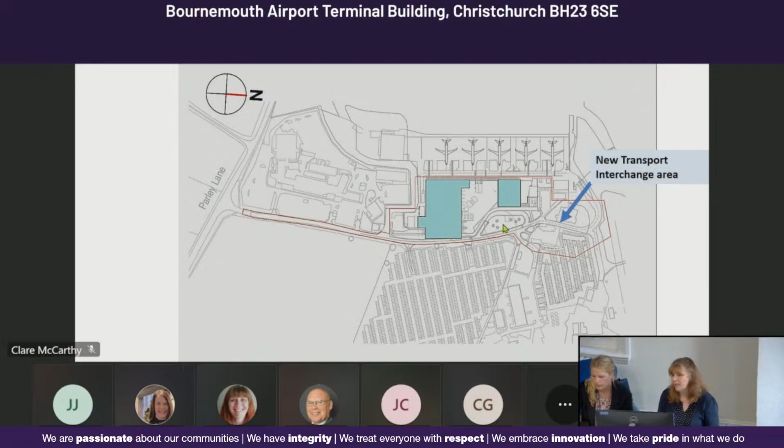So just to start with a bit of history, which is very important here for the terminal. In 2007, the terminal permission and legal agreement that went with it remains relevant for all matters to do with monitoring and controlling operations at the airport and passenger numbers. So this application is not going to take on that role of monitoring or controlling operations. That sticks with the original terminal application.

And with that, I want to read out all the matters that are listed on the screen, because it's really important, because we have received representations. There have been some late representations, 40 representations on the 25th of August, on Bank Holiday Monday, arrived from residents of Brockenhurst, really concerned about low-flying aircraft and aircraft noise.

And this is a matter which is controlled by the original Section 106 agreement, which has been varied in 2010 and 2015, and may be varied again in the future, but it all relates to that application. So what you're looking at, members, today is the physical extensions and the impact on traffic and the impact on environment from the extensions that are being undertaken and the transport interchange.

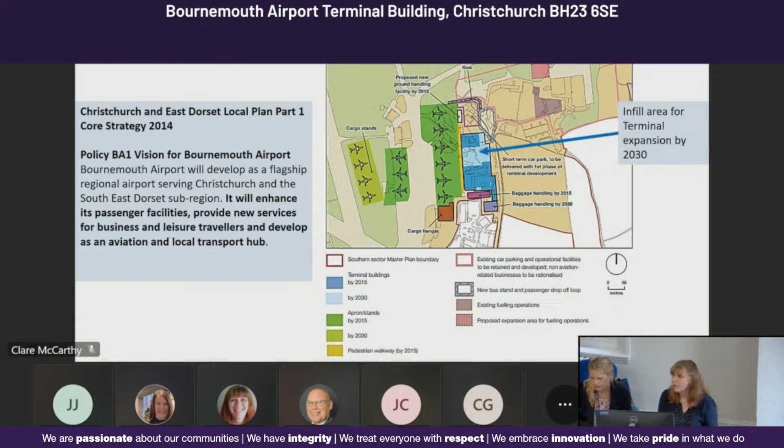This area down here, where it's going to be extended with a similar design, is also just hard standing and temporary buildings. Baggage will be shown later in this area, and that will cover the new extensions.

As I've mentioned before, this is the existing transport interchange, and it doesn't accommodate well enough facilities for buses, for taxi drop-offs, for cycles, and for access through. So the airport is investing in a completely new passenger interchange, and this area will become largely landscaped and hard surface for giving access to the new terminal buildings.

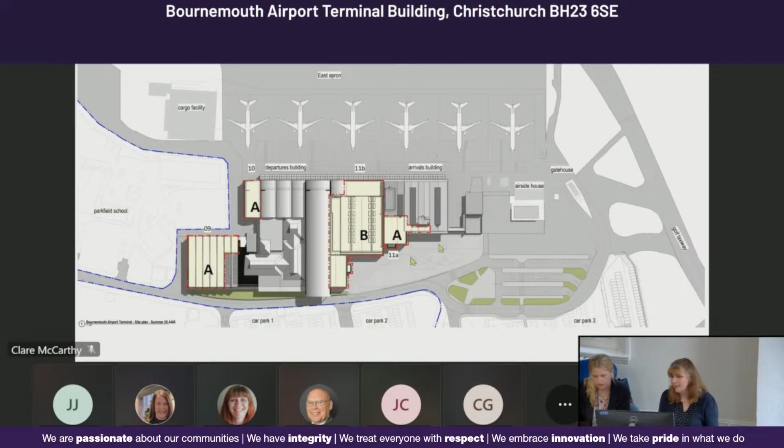As an engineer, the drawings are all engineering drawings, and the elevations are very small because we have 185 metres measured between the end of arrivals and the baggage area down here, so it's very hard to show in great detail.

So what I've done is zoom in on the arrivals part here. This is the view from the car parks at the airport. The east view is if you imagine yourself in those car parks looking forward to the entry points - that's the front of the arrivals building with the added extension in the blue area.

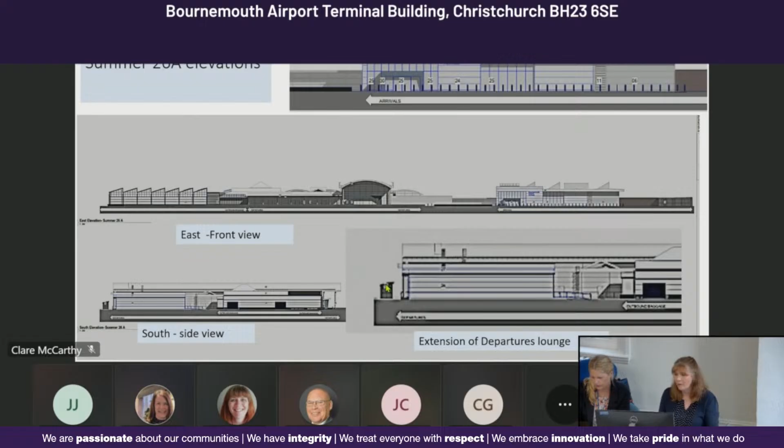Here are the west and north elevations. This is the view from the airfield of how that extra section would look, and the baggage area - that's the departures lounge, and that's the baggage area.

From the north view, from the runway looking down - which you're unlikely to be, but maybe from the transport interchange - you might just see this side view of the extra extension on the front of the arrivals building. That's the existing arrivals building there, and the extension goes to the far side of it a bit and in front of it a bit.

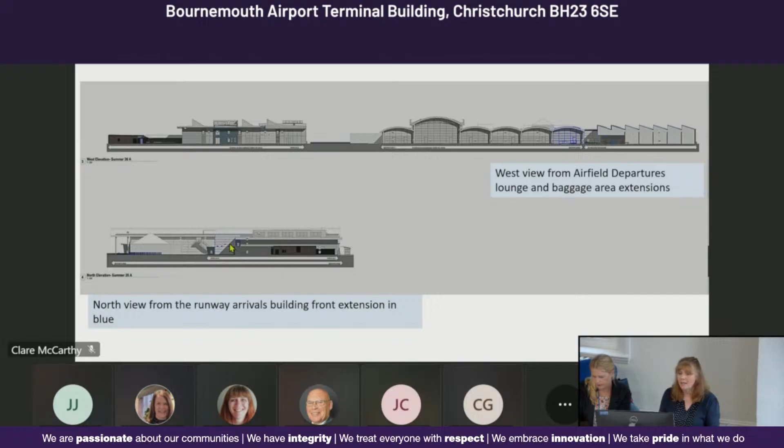This is part of the three extensions in the first phase. Now it's all combined for summer 26B - you can see all of the extensions combined, and this is the new infill part, the terminal extension linking the departures and arrivals buildings.

There's no change to the view from the south because at that stage we would already have this extra departures lounge building constructed. This is an enlargement of the view from the east, showing the connected arrivals, the new infill, and the departures building and how that all looks.

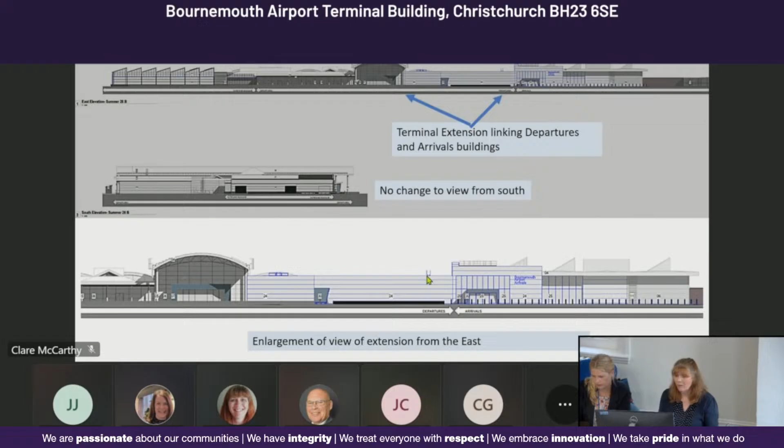The materials are the same as existing, with metal cladding, so it's all going to tie in and work well aesthetically.

The west and north views show the new infill extension viewed from the airfield, if you ever did view it from there - it would look like that from the rear, with the baggage and departure lounge.

And the north view of the arrivals - it's come up very fuzzy as it was so small, but just to try and show you how the extra parts look, that would be looking at the extra extension at the front here and this bit here.

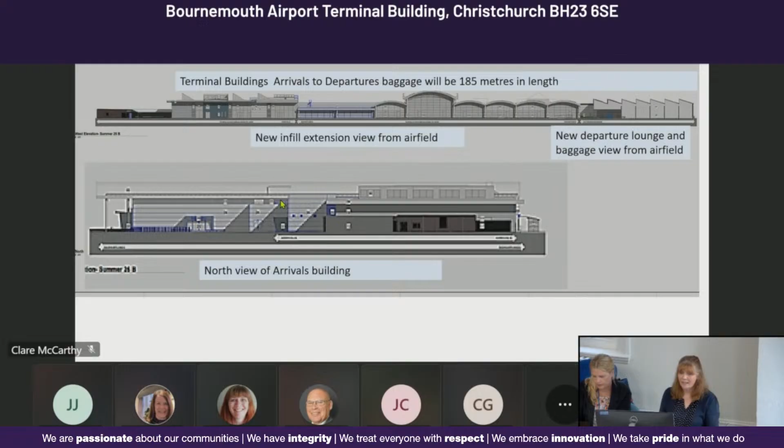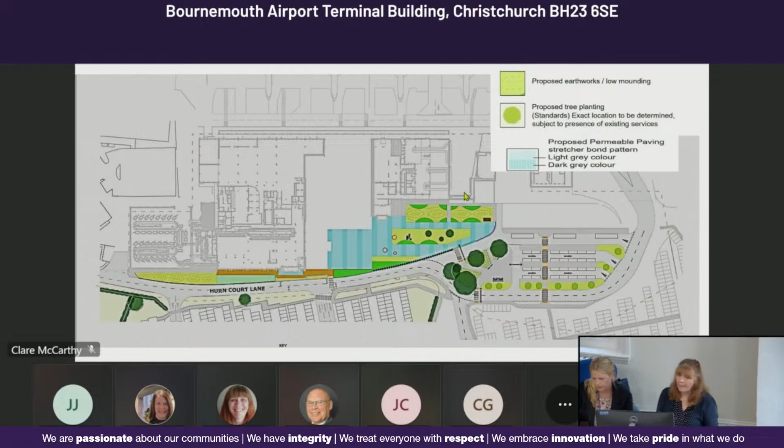Landscape and terminal area: this terminal entrance area is going to be largely permeable paving to help with sustainable drainage. You can see the 3 trees that are being removed dotted there, and 3 will be retained. These are also retained trees, the lovely oak trees, which I'll give you a photograph of next, and there's new tree planting all around the transport interchange.

I'll explain what's in this interchange in the next slide, but that won't have all this landscaping on it. So imagine we have trees to soften the edge of that area, and some mounding in this area—these are existing features. You can also see retention of existing trees in this area on Hurn Court Lane.

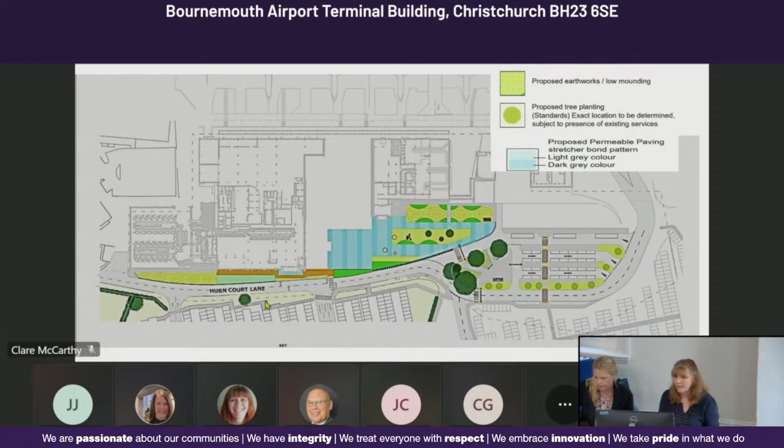These are the trees that form the front part of the transport interchange, and they are to be retained. There are conditions to ensure they are protected during development with screening, and there are 3 trees in this line—1, 2, 3—and 1 here. They're all to be retained.

So the transport interchange—this is probably the biggest, most interesting part of this application, because we have at last got some really good sustainable transport measures in place, which were all identified in the Green Travel Plan back in 2007. But as numbers have risen, we really need to address that now and get things improved.

So the permeable paving area is going to enable pedestrians to get through very easily, once they've been dropped off, to access the departures lounge. If they're coming out of the arrivals building, they can come straight out onto this area and connect up to catch their bus or coach, or get a taxi at the taxi ranks here where the taxi drop-off is. There's a lot more room now—4 lines for taxi drop-offs, 3 places for bus and coach.

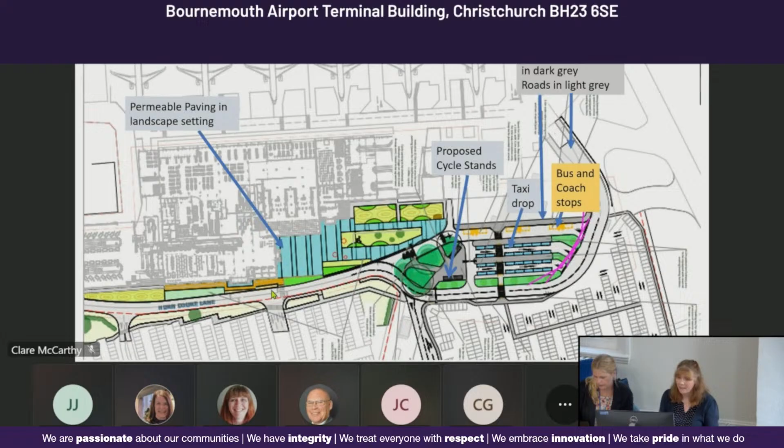The proposed cycle stands are now moved to a much better location in this area here. You can see the landscaped tree areas here and here are to be retained. It should be a pleasant walk through for people, and a very well thought through interchange, working out how traffic can come in and out and back through Hurn Court Lane. The Beryl bikes, which I expect you're familiar with—you hire and take them to different parts of Bournemouth.

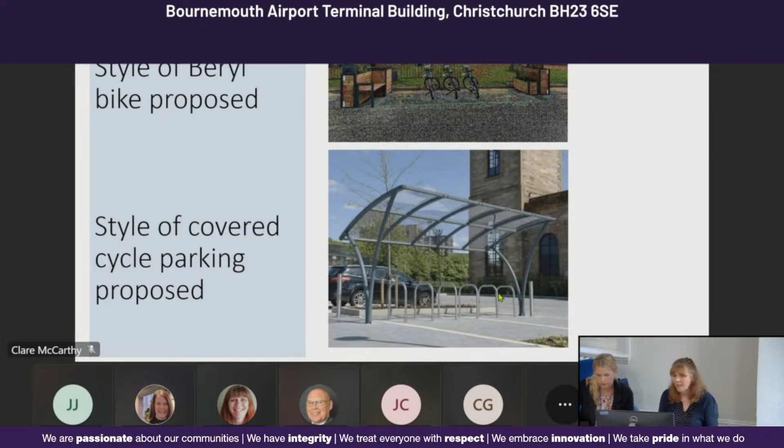The next thing to point out is the need for a red zone and red route. Hurn Court Lane access, which I identified at the beginning, has double yellow lines at present, and there have been numerous complaints since the airport started charging for drop-off, which it's entitled to do. The consequence is that the public take matters into their own hands and park on double yellow lines while waiting for passengers to come out from flights, which is a hazard. It's not safe and it's dangerous.

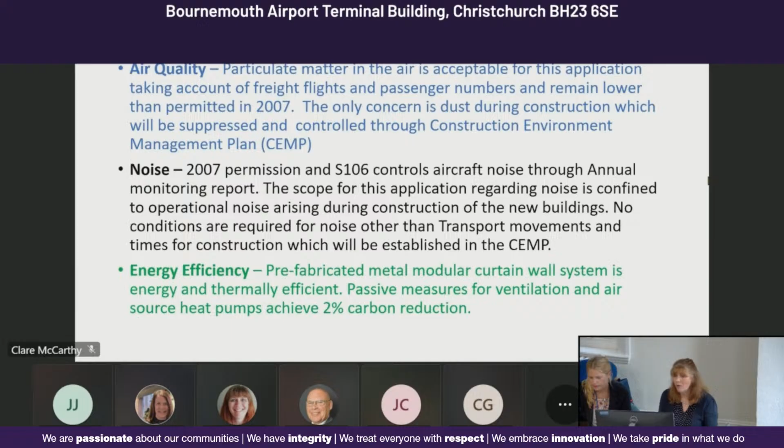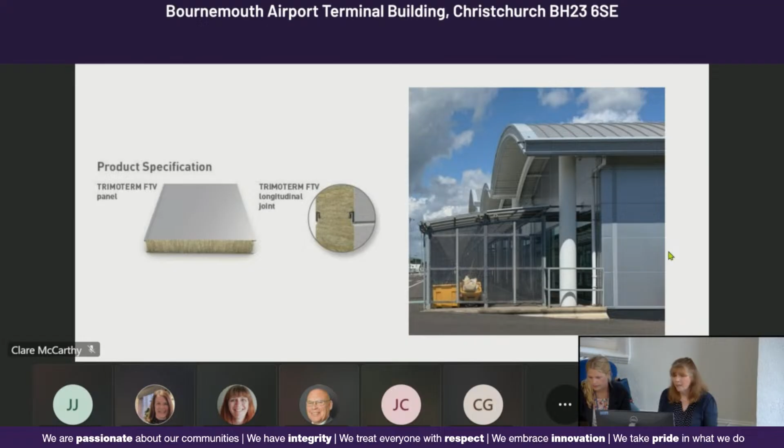So, sustainable development - there's so much more sustainable benefits from the cycle provision that we have, from the buses and the access for buses in and out of the system. The transport improvements have presented much of that.

It's more sustainable with air source heat pumps in the roof of the new infill extension, I believe, and the solar panels on the arrivals building. So the vision for Bournemouth Airport is being brought into effect with all these elements which I showed you on the strategy plan.

The infrastructure for the airport is being provided, which is needed for the passengers coming.

Safeguarding of biodiversity - we have a biodiversity net gain plan, and it's been agreed. The majority of the planting can be replanted on site, but acid grassland is going to have to go off site, and potentially a couple of trees off site too, but we haven't quite got to that detailed level yet.

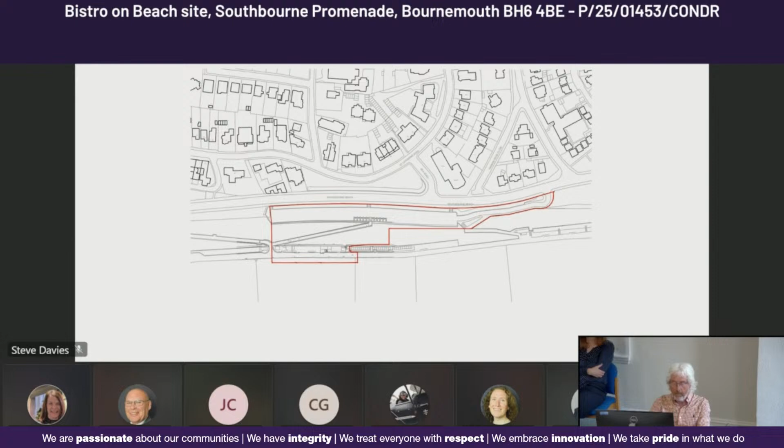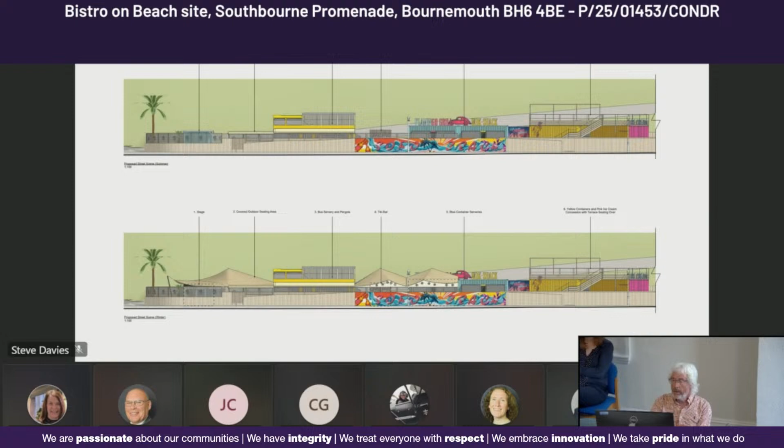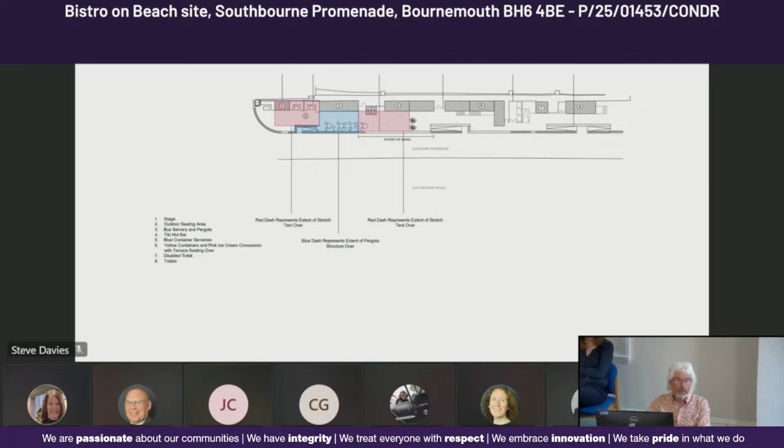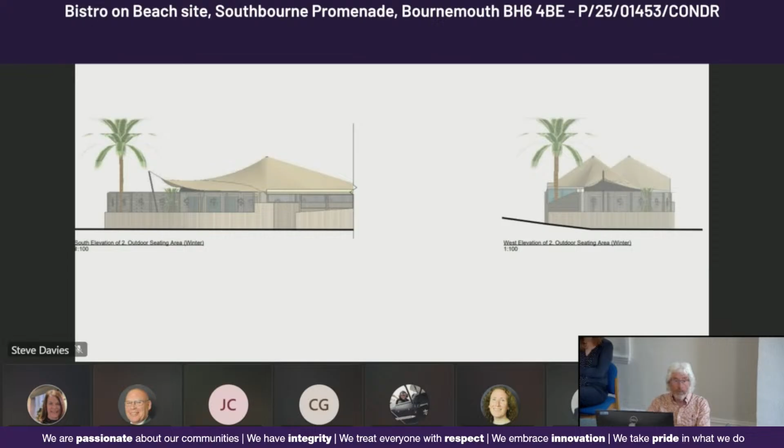This is the elevations of what we approved previously. You can see it's a sort of array of temporary buildings on an enclosed site. It also includes decking on the beach, which isn't shown here. You can see it's got a temporary appearance with some canopies that they put over in the winter time. That's the decking area on the beach.

Members will be aware we've approved quite a few other decks along the beach. Again, this is a perspective image of it. The only difference now is that we put a condition on that they reviewed their mural on the front. You can see that mural on the front, and that's different now. That again shows the decking there.

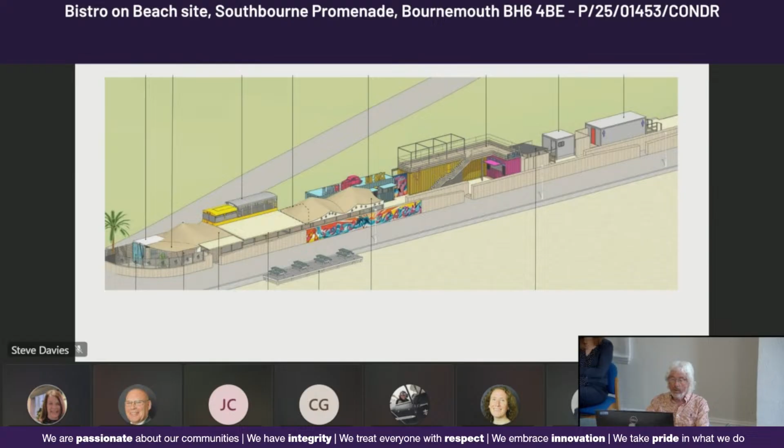Chair, if you look at my report, the way I've set it out is I've set out the issues we dealt with previously, and this consent has got another year to run. But the applicants have applied for one additional year, and that's the issue members need to consider today, whether that additional year is acceptable. I've run through the issues discussed previously in relation to flooding, nuisance to neighbours, and the appearance of the site.

We've got some objections to the development, and that's why it's being presented to the committee today. I think in terms of the issues I'd like to raise, I'd address the points put out by the objectors.

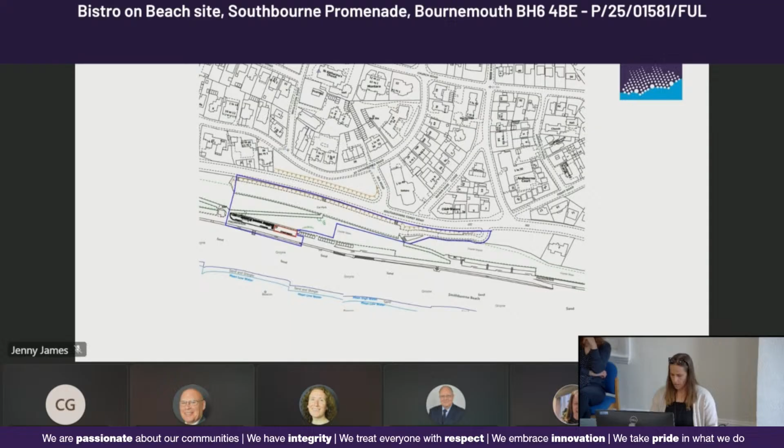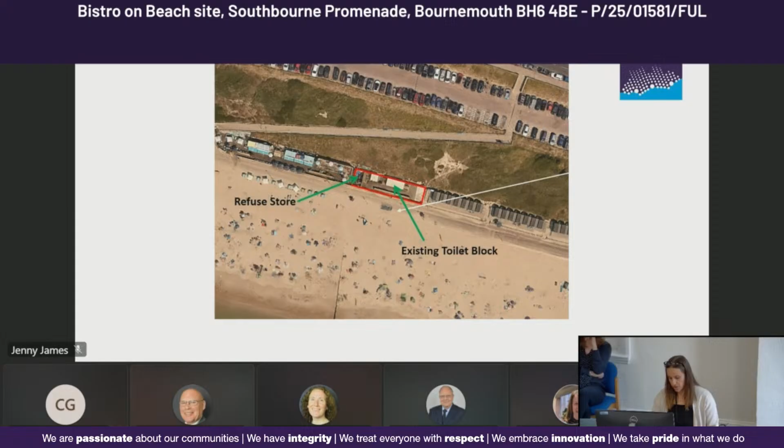Just moving on, this is an aerial view of the application site. To recap, it is next to the site we've just been talking about. My application relates to the refuse store there on the left, and the two white rectangles, which are the existing toilet blocks. As you can see, it's a fairly underdeveloped site in relation to the existing hard standing that is there.

These are some recent site photos I took a couple of weeks ago, looking at the site from the promenade. You can see the existing structures there, with the top part of the bin store visible on the left, and on the right you can see the top part of the existing toilet blocks, which are fairly typical portable toilet blocks. To the front, this existing timber structure was built by BCP as part of the previous tender for the site.

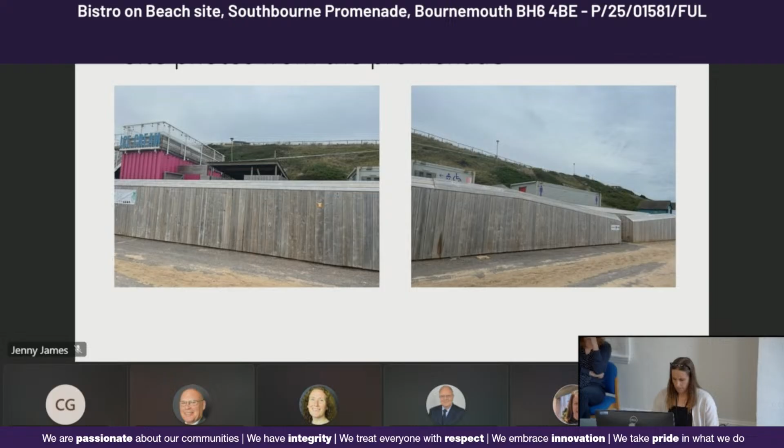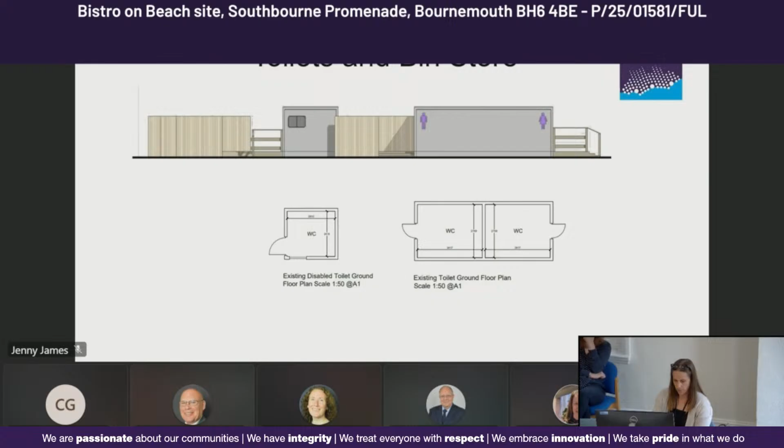The bin stores would still be operated, and collections of the waste would still be operated by BCP in the same way as all of the similar operations along the beachfront in BCP.

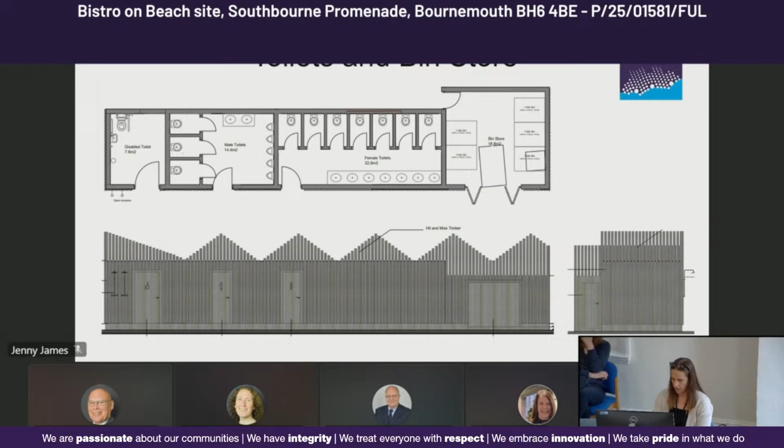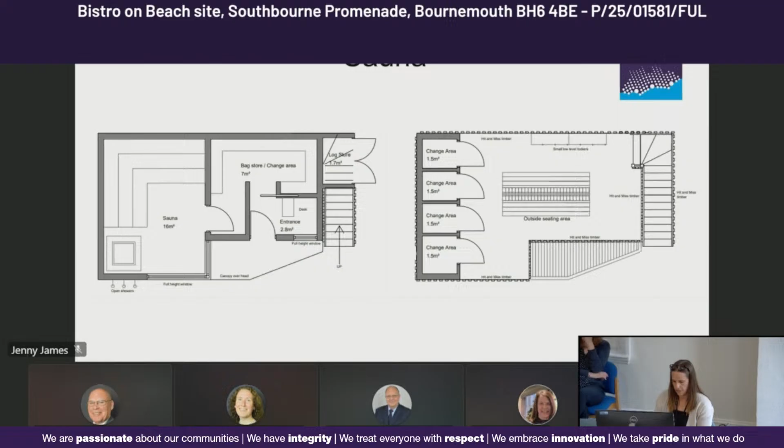There are also 3 showers provided to the front to use before or after the sauna or being in the sea.

The materials are contrasting light and dark timber, which is appropriate to the area, timber being the main material currently used on the site. The upper part is hit and miss, so you'll be able to see through it, and that's lighter in appearance, and again is appropriate to the area.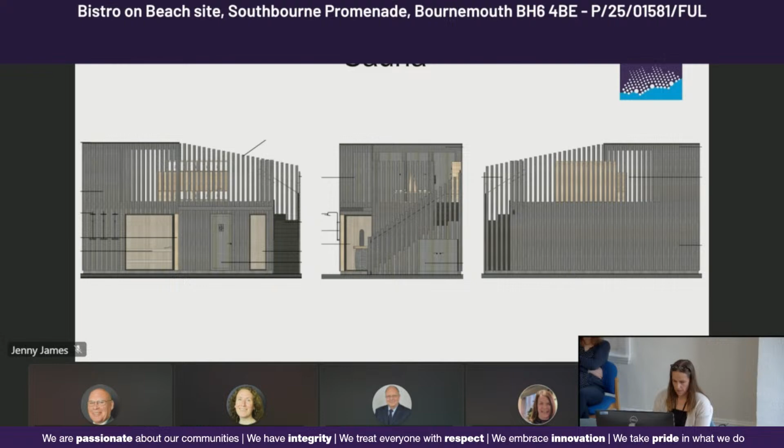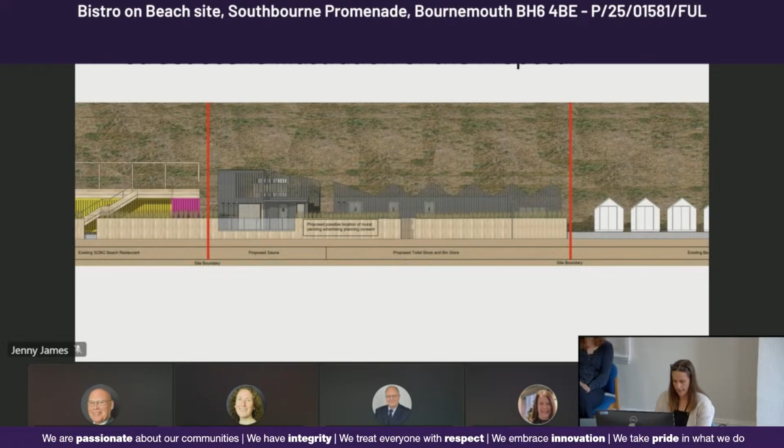Here's just a few other illustrations of the proposal.

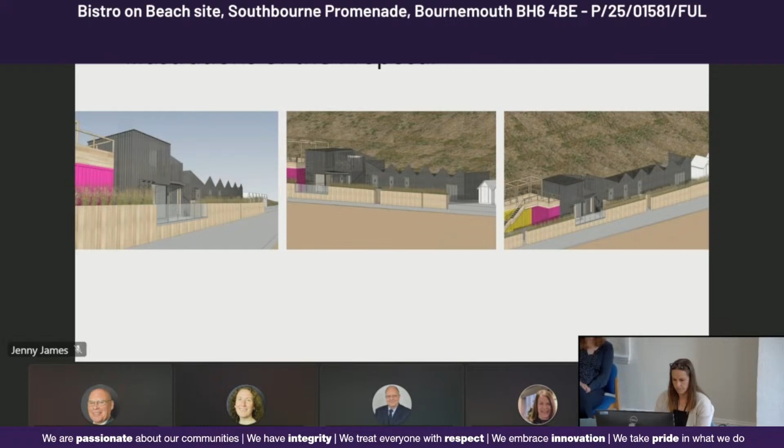The main issues raised within the application were initially the principle of the introduction of a sauna use to this part of the beach, and secondly, mostly within the public response, the potential impact of smoke emissions to the residential amenity of nearby properties above, from the use of a wood-fired stove and its operation for extensive periods of time.

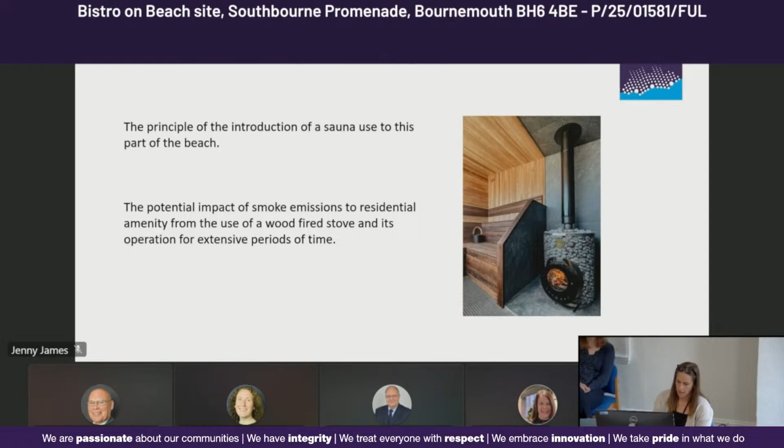Turning to the principle of the development, it was assessed to comply with the relevant policies, policy CS29, protecting tourism and cultural facilities. The proposal would add a suitable visitor activity to this part of the beachfront and would support tourism as set out in that policy.

Policy CS6 is delivering sustainable communities, and the proposal provides enhanced key facilities with the reprovision of the toilets and the addition of a sauna use. Again, this is a good development opportunity for the area.

And policy CS31, recreation, play and sports. The built form is wider on the site than is currently existing, but it's within the same area as previous built form, and it does not unduly impact on the public open space. It doesn't encroach at all on the promenade, the beach, or any of those protected areas, and it's providing a suitable recreational use.

The second main issue is residential amenity, and the relevant policy is CS38, minimising pollution, where the main concern from the public was the potentially harmful emissions from the wood-fired system. The applicant was asked if the system could be replaced with an electric system in the same manner as what is currently available at the Avon beach sauna. This change was forthcoming, and so the application was amended to exclude a wood-fired sauna, and so there will be an electric system where there will be no emissions to local residences at all. So that issue essentially has been resolved.

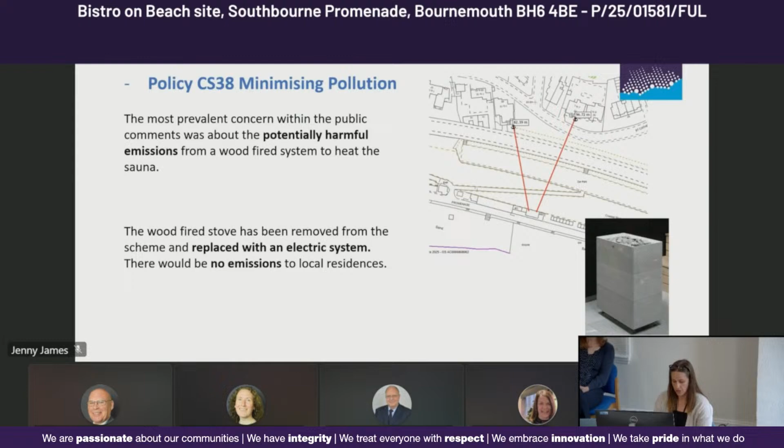Just for thoroughness in terms of residential amenity, the additional maximum of 25 people an hour to the site for this use is not likely to cause harm from additional comings and goings. The sauna use will not generate any sort of undue noise either, and following the amendments, there were no objections from environmental health.

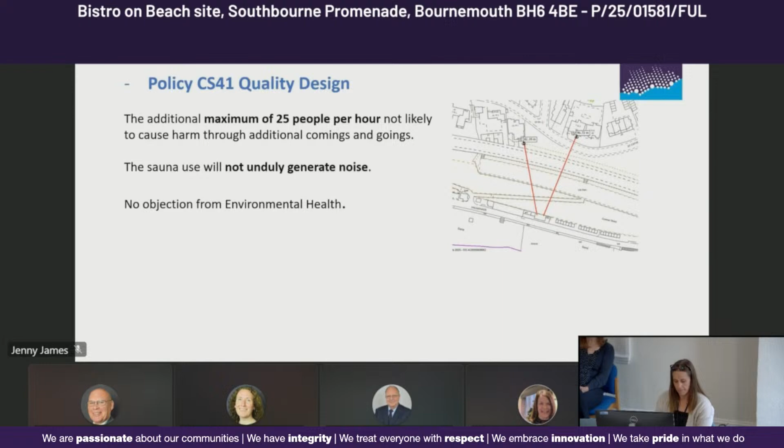In conclusion, the introduction of recreational use and the better provision of toilets and showers is acceptable in this location. The design, scale and materials are suitable for this beachfront location. There are no unacceptable impacts to nearby residents or residential properties, and no objections from environmental health. There are also no unacceptable impacts to highways or pedestrian safety, subject to a condition for a suitable construction management plan, which would need to be approved prior to construction.